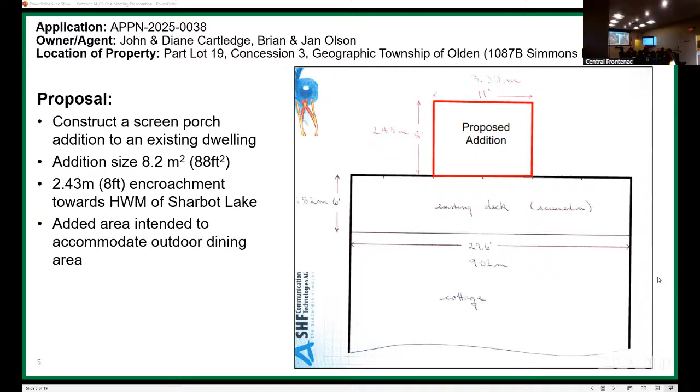On the next slide, the left side shows an overview of the property with the existing dwelling and screen porch, with the proposed addition shown as the small red box towards the water side of the property. On the right is a view of the existing covered screen porch area, which is about 6 feet wide, making it fairly tight for table, chairs, and people. So the intention is to add a portion in the middle large enough to accommodate this additional area.

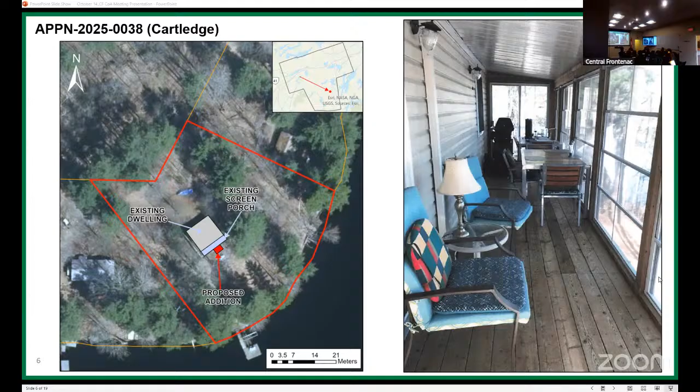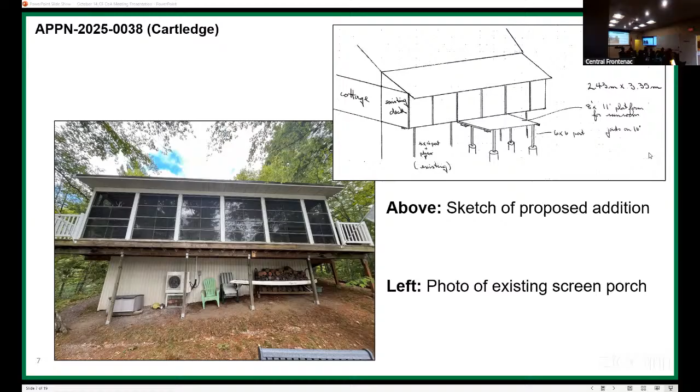That's noted because it's something the conservation authority pointed out. One of their recommendations was that through this addition and construction, eaves troughs be installed to direct runoff back and away from the lake rather than down the slope toward it. This application was circulated for review by Rideau Valley Conservation Authority, who provided comments dated August 24th of this year with no objections to the application as submitted. Based on their review, there are no natural hazard concerns identified for the property. They also noted that the roof runoff should be directed away from the lake, as there are no existing eaves troughs or downspouts on any portion of the cottage. Their recommendation was that, even if just on the part of the roof that slopes toward the lake, eaves troughs be added and runoff directed away to help reduce erosion potential.

There is no increase in living space, and the construction is not proposed near any existing septic system components, so no septic performance review was required. There were no public comments received regarding this application, and planning staff are recommending that, subject to any comments or items raised at this meeting, the committee approve the application as submitted and subject to the conditions listed in the planning report.

Thank you. Are there any comments from the applicant or their agent, either in person or online? The plan is to then look at getting a sunroom built on top of it, for an enclosed dining area. It's kind of obvious, but in terms of the diagrams, it's just showing the extension of the floor space, and there'll be some room. I take it you are the applicant?

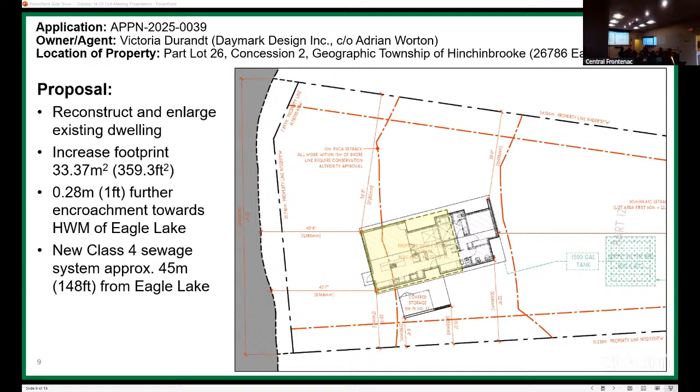While planning staff were not able to visit the site directly, as it is water access and there's some challenges getting there, the township doesn't necessarily have its own boat, we can borrow it from fire sometimes. The applicants were excellent in providing some detailed site photos to give both planning staff and the committee a good idea of what the property looks like currently.

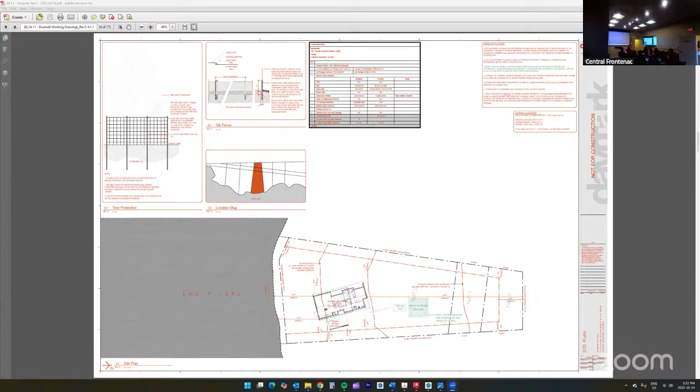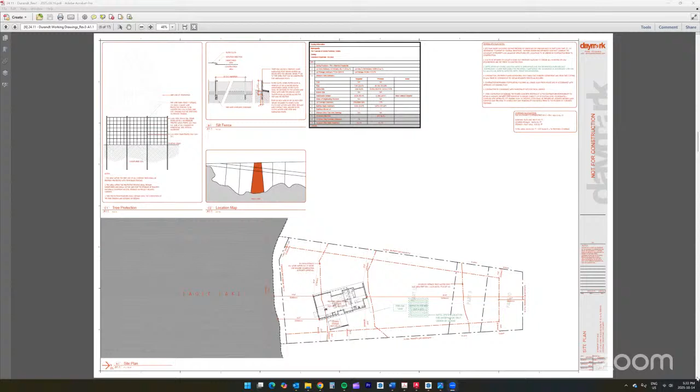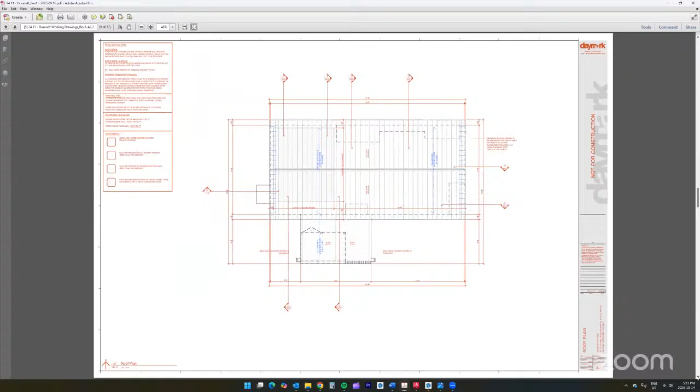I just wanted to give you some additional context. The intent is to provide a modest single-story cottage. I thought the planning staff did an excellent job describing the intent from a site plan perspective, but I also wanted to give you a quick overview from the planning perspective, just so you have an idea of what you're looking at. Effectively it's a single-story cottage with a small internal content, kitchen, two bedroom, staying within the footprint, a simple single sloped roof with gable ends. I did include some elevations in the submission application so you can have a sense of what the overall architectural image is going to be. Again, it's a fairly modest building, staying in line with the existing topography and what is currently there now, just modernizing a little bit.

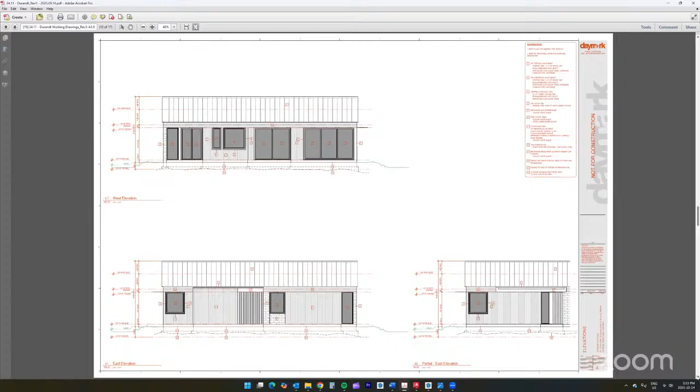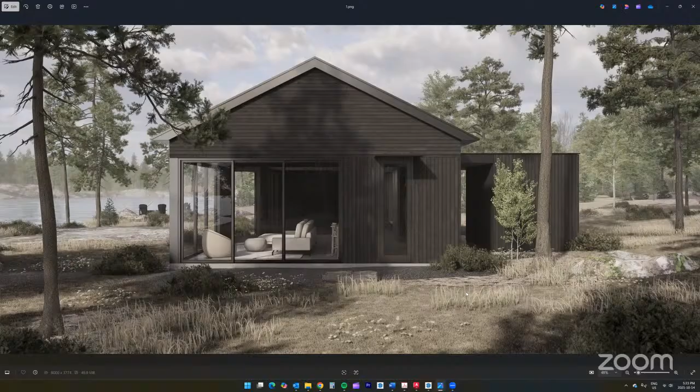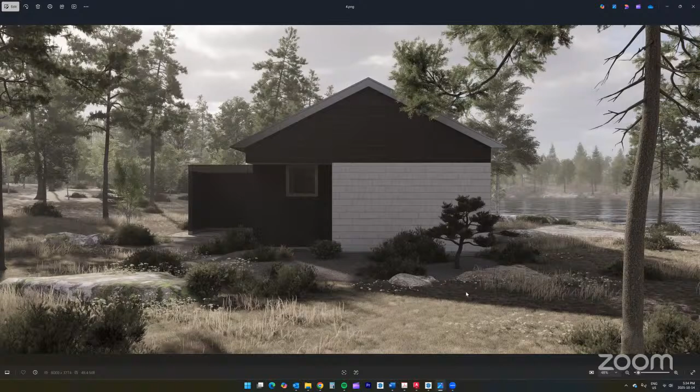There are elevations that were submitted with the application, but I thought if I had the chance to share, it'd be great to show the committee actual images of what this can look like from a rendering perspective. So I just wanted to really quickly walk you through the exterior elevations. This is the side that would face the water. This is the side with the covered storage area under a flat roof. The main cottage again has a gabled single slope roof over it. This is a side elevation. This is the side facing away from the water, so this is what will push outside of the existing footprint and away from the water. And then this is the opposing elevation.

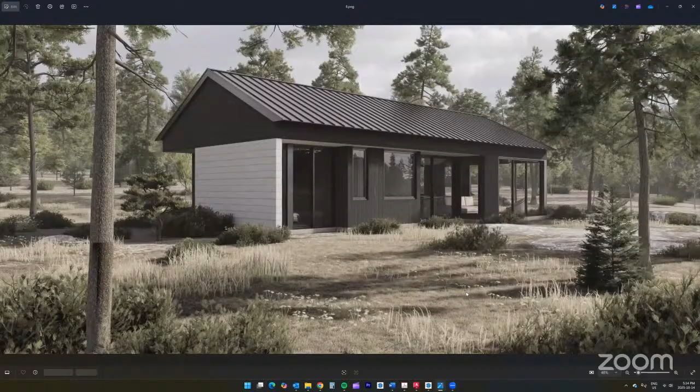I just wanted to really quickly walk you through that because it's wonderful to give the Committee of Adjustment the opportunity to see what this is actually going to look like, in order to have a better course of action in making your decision. Without that, I don't have any additional comments.

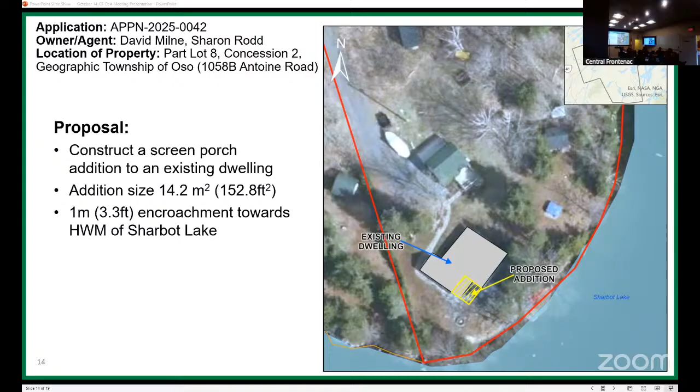Thank you, Mr. Chair. As you noted, this is for an application for property located at 1058B Antoine Road. This is the end of Antoine Road and is a peninsula that extends into the east basin of Sharbot Lake. Here on the screen, you can see the existing dwelling is highlighted and the proposed addition is shown with the yellow hatching. The intent is to construct a screen porch addition to the existing dwelling. The addition will have an area of approximately 14.2 square meters, or just under 153 square feet, with a 1 meter or 3.3 foot further encroachment towards Sharbot Lake. In this case, there is a portion of roof over part of where the addition is proposed.

So on the left, here's a photo. You can see that currently there's a stone barbecue area and patio. The area for the addition is outlined in red. There is some roof over it currently that will be removed and then reconfigured to more meet the roof line of the rest of the cottage that this will line up with ultimately. On the right hand side, you can see there's a sketch with a layout showing the interior of the existing cottage, and the area proposed for the addition again is outlined in yellow on that right hand side, just to give an idea of what is proposed.

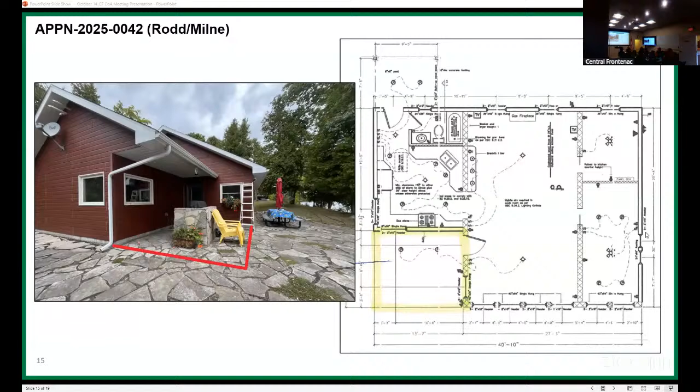This application was circulated for review by Conservation Authority. Mississippi Valley had no objections to the application. Again, there's no natural hazard concerns identified for this property. As is standard for Mississippi Valley, there were several erosion control measures recommended, including silt fencing during construction, no alteration of drainage patterns towards the neighbors, things like that. There is no conservation permit needed for this construction. Mississippi Valley only regulates shoreline and in-water works in this area, so while they have commented, there's no permit required for this construction prior to the issuance of any building permit from the township. Again, there's no increase in living space.

It's more of the outside screen porch. People just keep wanting to have dinner without bugs.

I don't know. And the construction's not near any existing portions of the septic system. There are no public comments received regarding this application either. Subject to anything noted today, planning staff are recommending that this application is approved as submitted and with the conditions listed in the planning report.